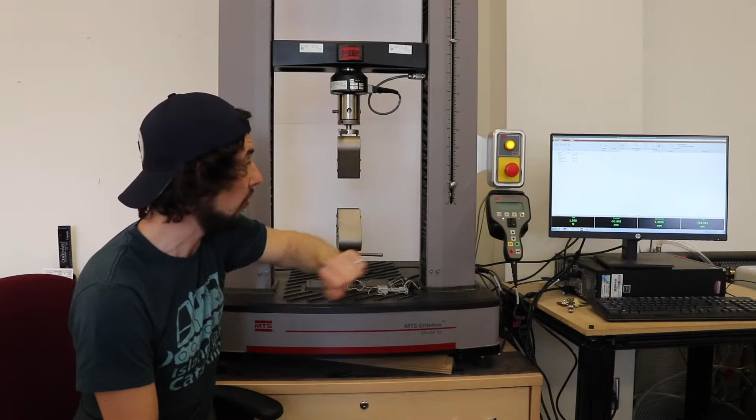So here's our materials testing system. It's an electromechanical system built by the MTS company. And it's got a couple of different grips. The lower grip here is fixed to the base of the instrument. The upper grip is attached to the crosshead, which moves up and down. And that's computer controlled over there with our PC.

And in between the upper grip and the crosshead in series is a load cell, and that's a force transducer. So that records the force that is being applied to a sample positioned in between the grips as the crosshead moves upwards for a tensile test or downwards for a compressive or bending test.

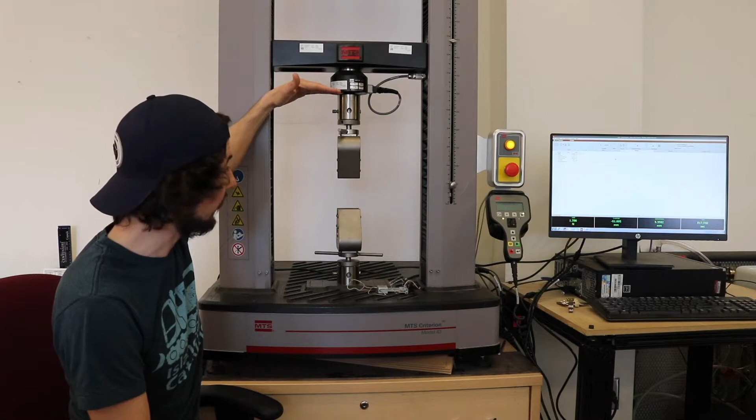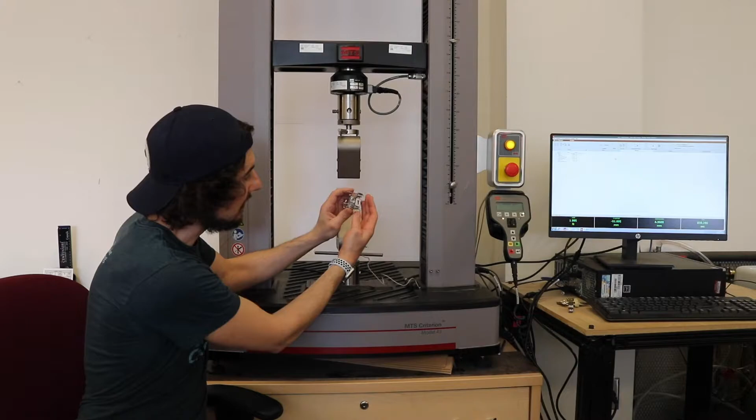Now, for elongation of the sample, which we'd need to calculate stress and strain and produce a stress-strain curve, what's used is this little device called an extensometer. So it's a really sensitive device, and what it does is it has two knife edges right on the ends there that get physically attached to the sample that's being tested using these little spring clips. So these little spring clips just go around your sample and secure the knife edges onto the sample.

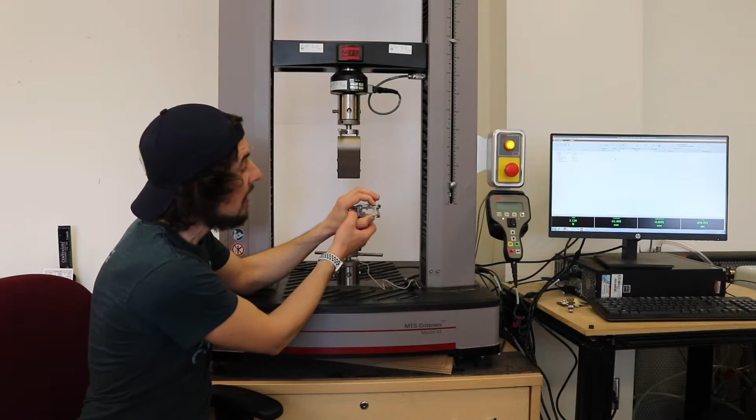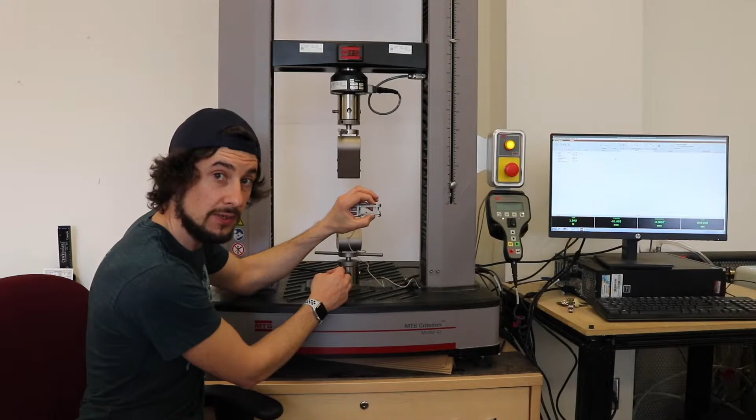And the extensometer starts on the sample with its arms closed at the start of the test. And there's a physical stop here on the extensometer so that you know when the extensometer is fully closed, the distance between these two knife edges is 25.00 millimeters. And as the sample elongates during the test, the arms of the extensometer separate, and that separation is recorded. And that separation is equal to the amount of elongation that the sample experienced between those two knife edges.

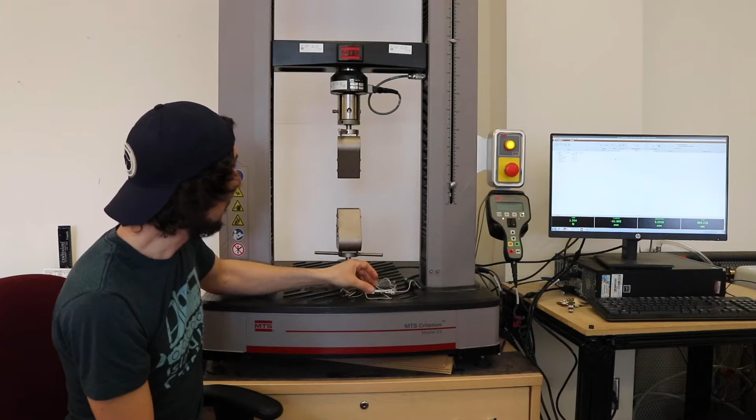During the test, the extension data from the extensometer and the force data from the load cell are transmitted and streamed to the computer where they're saved in a data file. So the data file that we're going to get out of each test has force data, elongation data, and we'll also record the time too. So there are all of those data columns that you're going to get in the test files for these different samples. So let's take a look at the different samples that we're going to test today.

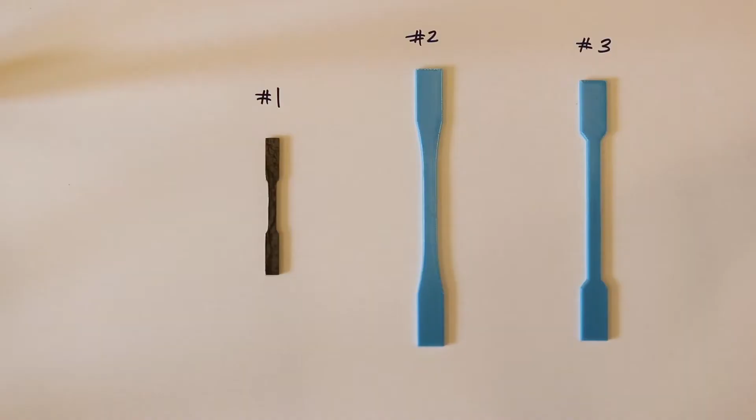Okay, so here are the three different test samples that we're going to test in today's lab. The first one's a sample of A1011 structural steel that's very similar in material properties to the A36 steel in your material property tables. And the second two samples are both made out of PLA plastic that's being printed with our Dremel 3D printers here in the lab.

Now, the shape of these tensile samples is described as a dog bone shape, and the reason for that is that the wider portions at the top and the bottom are where the samples are gripped for mechanical testing. And the compression force that's caused by the grips tightening against them induces some additional stresses that you don't want to have compounded into the results of the tensile stresses that are being created during your test.

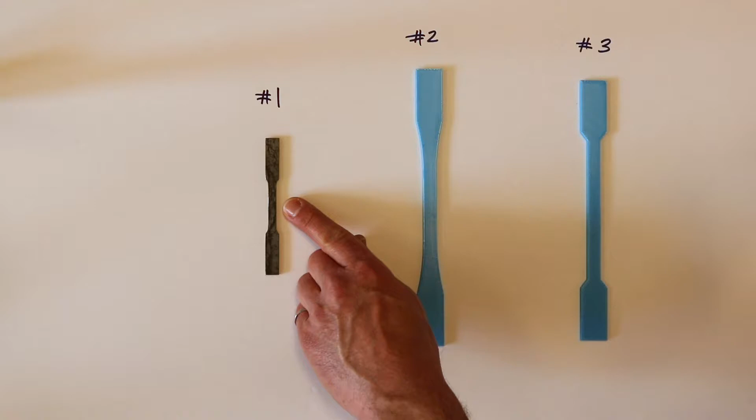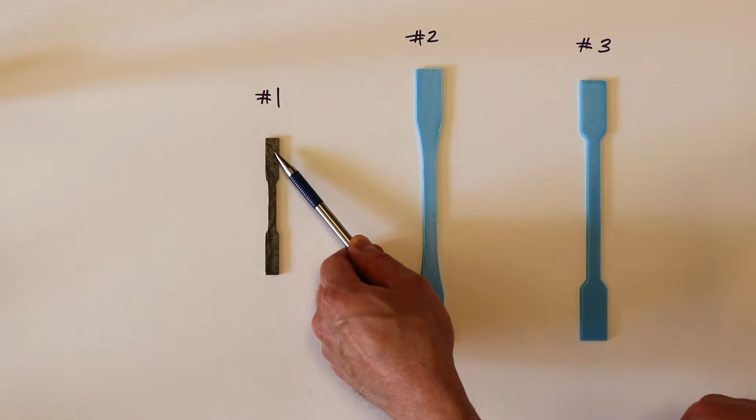So the actual area where the measurements are made for the stress that the sample is experiencing is throughout this center region that's called the gauge region of the sample. And this central region is far enough removed from the spot where the sample is going to be gripped and compressed that our lines of internal force transmission throughout this central region are all going to be nice and parallel to one another and aligned longitudinally with the sample's axis.

So in order to calculate stress from the force that's being applied to the samples, we need to know what the width of each sample is, so the measurement across here, and also what the thickness of each sample is, and that gives you the cross-sectional area of the gauge region. So what I'm going to do is I'm just going to use my calipers to measure what the width and thickness of each one of these three samples is, and then I'll write them down here at the bottom.

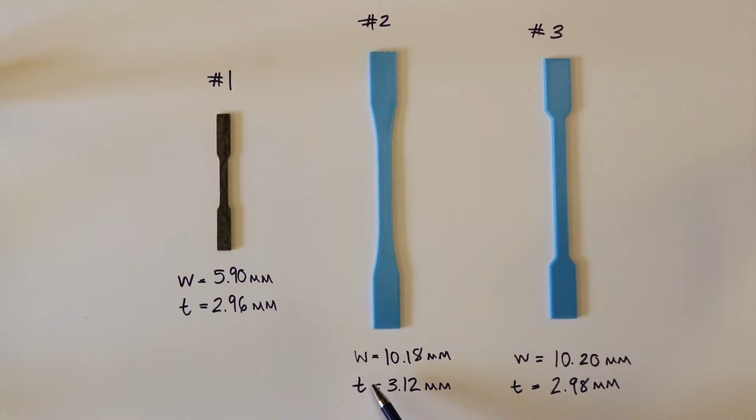Okay, so I've made the measurements of the width and thickness of each of our three samples, and you can see them written down there. So for the structural steel, width 5.90 millimeters, thickness 2.96 millimeters. For the first PLA sample, second sample out of the three, we have a width 10.18 millimeters and a thickness 3.12 millimeters. And then for our third sample, also PLA, we have a width of 10.20 millimeters and a thickness of 2.98 millimeters.

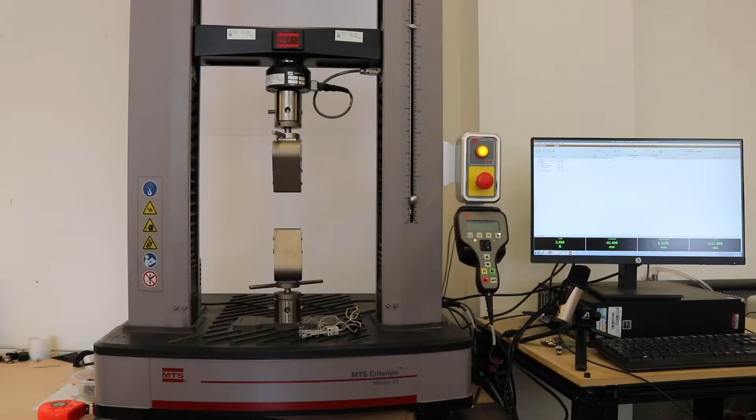So I'll get the first sample now. So we're going to do the structural steel first. So I'll mount that in the material testing system, and then we can start our test. Okay, so I've got our first sample here, the structural steel, and what I'm going to do now is mount this in the material testing system.

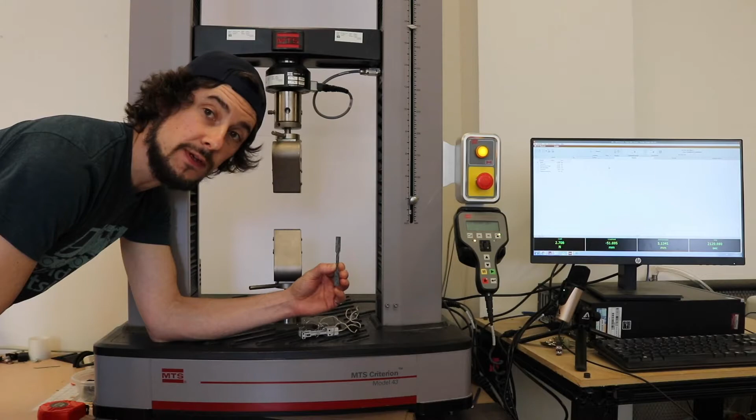So the first thing I'm going to do is mount it in the bottom fixed grip here, and I'm just making sure that it's positioned in the center and getting it set so it's vertically straight. Okay, and then I'm going to tighten this lower grip up and straighten it slightly. Perfect. Now I'm going to carefully put on the extensometer, and I'll give you a close-up of what this looks like after I get it on.

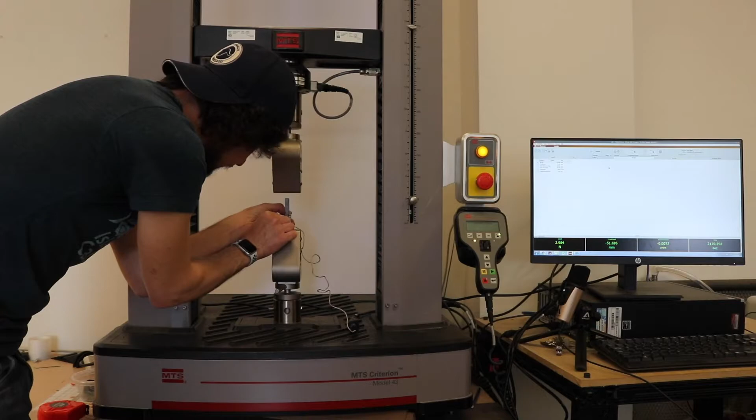But I'm squeezing together the arms just lightly to make sure they're fully closed. And there we go, the bottom knife edge is clipped on now, and the top knife edge is also clipped on. So the extensometer's attached now. Now the sample at this point is under zero load and it's zero elongation.

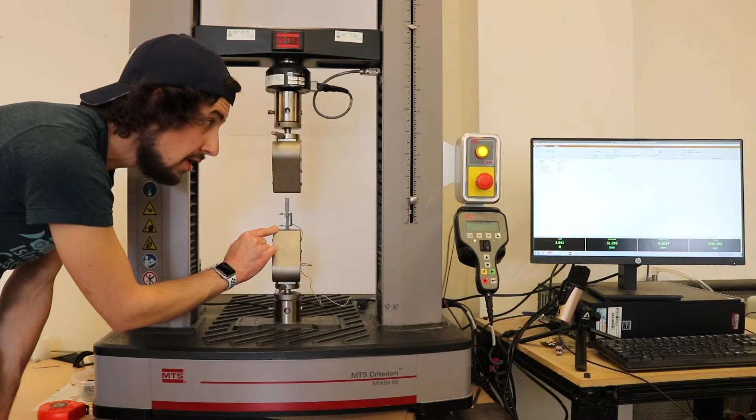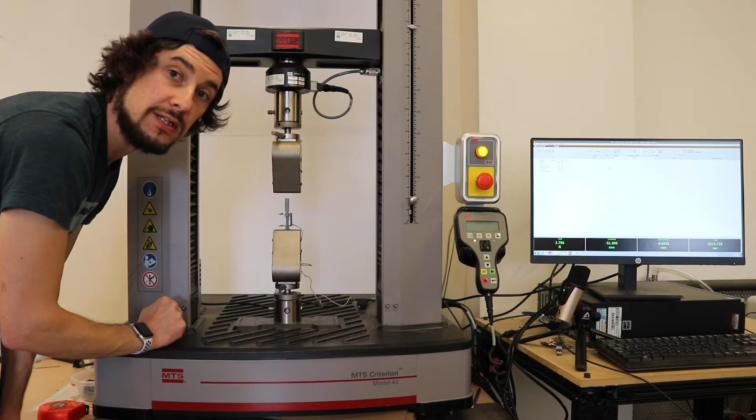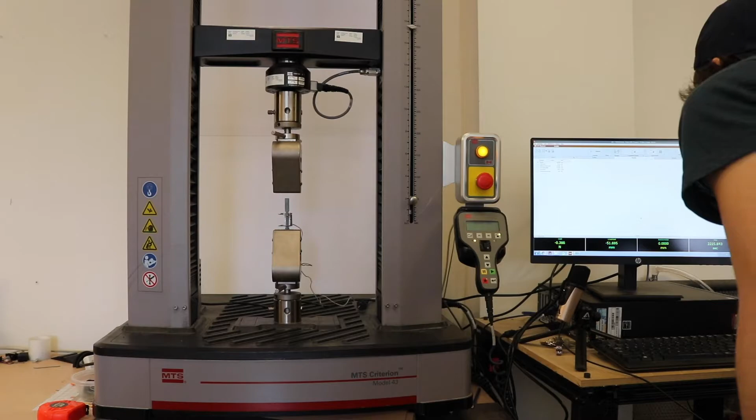So what I want to do is I want to go over to the computer terminal and just zero the force on the load cell and zero the displacement of the extensometer. So do that. So zero load and zero extension. Okay, so now we've got zero load, zero extension. Now I'm going to make sure that the top clamp is opened up, and I'm going to lower the crosshead down.

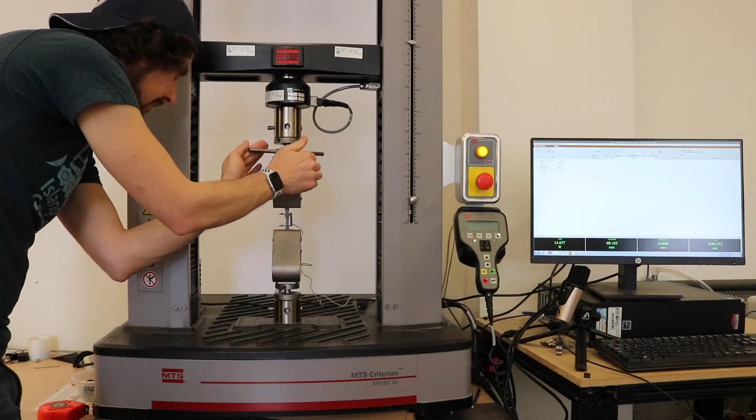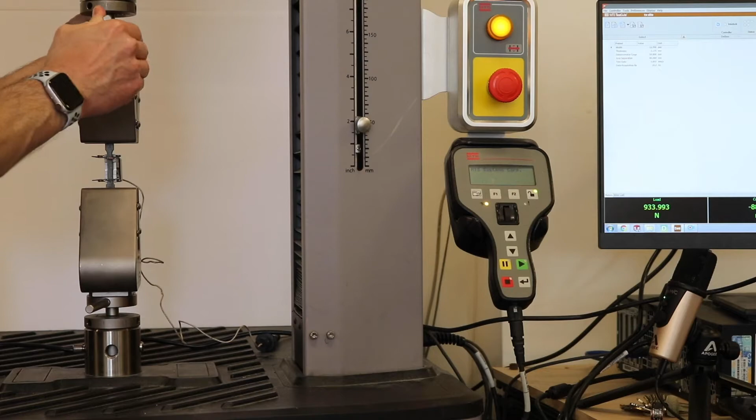Okay, there we go. And then I'm going to tighten the top grip up. There we go. Okay, you may be able to see over here now that when I tighten that clamp up, there's a significant load that's being applied, right? So here I've loosened the clamp again. Now I'm going to tighten the clamp up, and there we go.

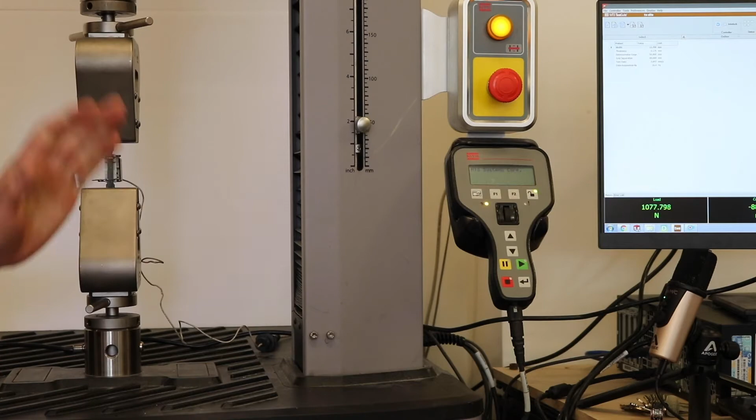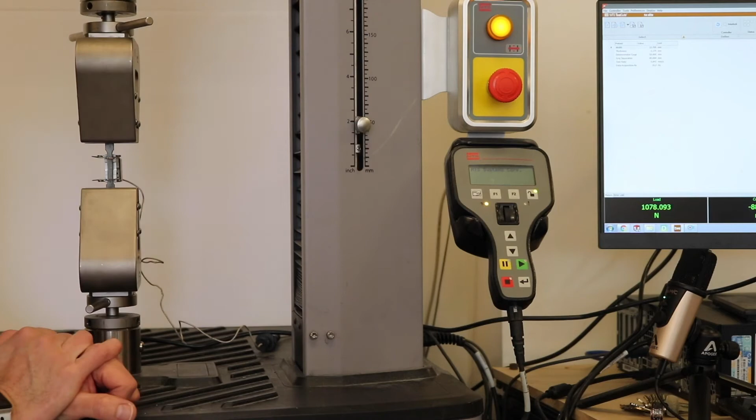So just by clamping it, we've extended the sample up slightly because of the way these grips are designed, but that's okay because that load now that we've induced by tightening up the clamps is captured as our starting load, and the extension that's being recorded is captured as our starting extension as well.

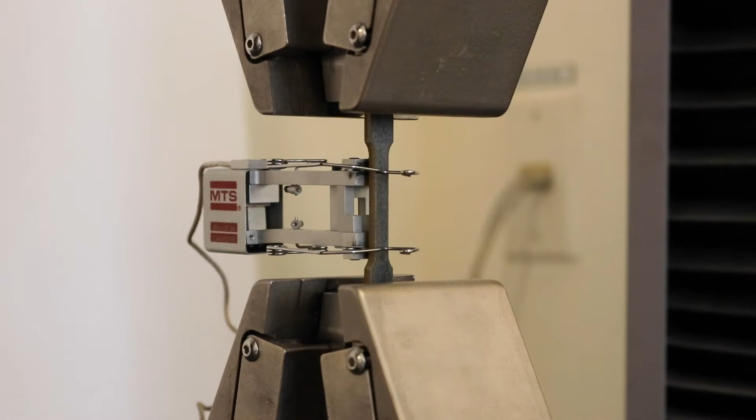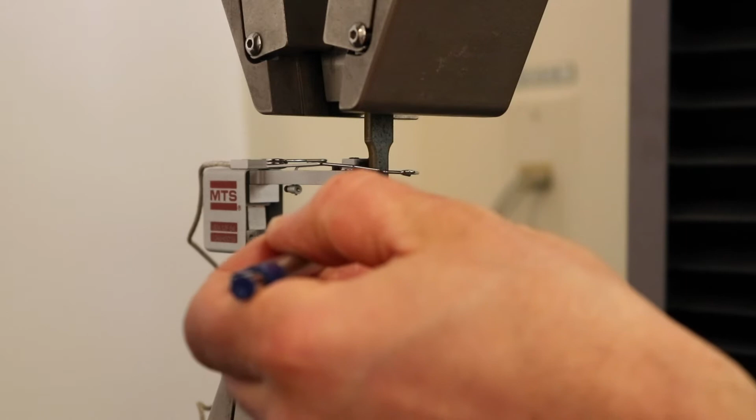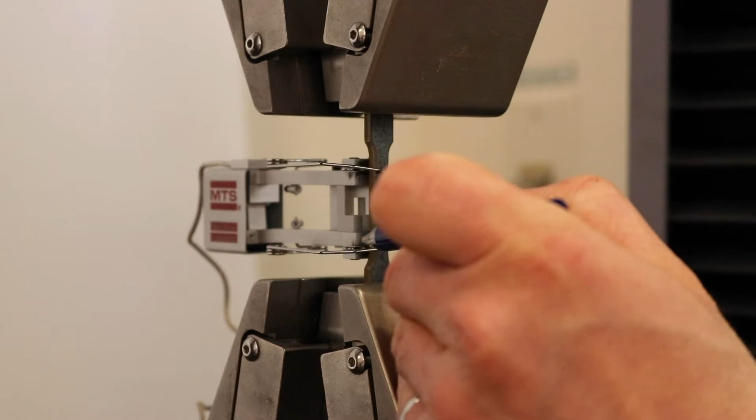So here's a close-up look at what that extensometer looks like attached to our sample. So you can see the clips that are holding it in place, and the knife edges on the back here that clip to the sample. So as these arms of the extensometer separate, it'll record the extension between these two knife edges that are initially separated by a distance of 25.00 millimeters.

Okay, so we're all set up here now. We've got our sample fixed in place and we're ready to begin this test. So I'll hit the play button and the crosshead will start moving up here on the system and we'll get a live graph that develops of force that's being applied to the sample versus elongation of those extensometer arms, or separation of the extensometer arms, which is elongation of the sample between the arms.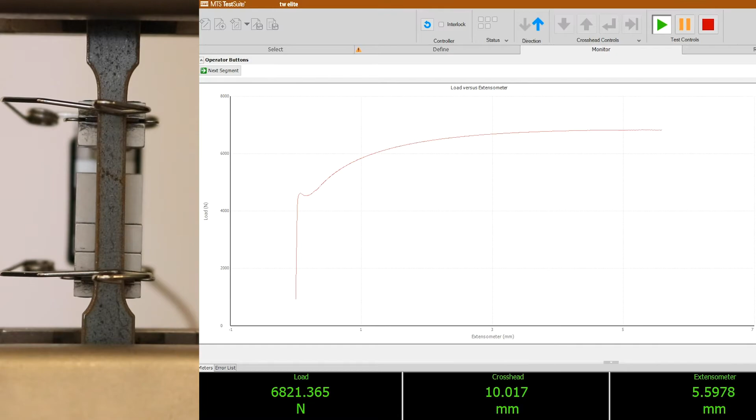Okay, so you can see that the slope is becoming increasingly flat, so we're approaching the ultimate strength of the sample here. And as soon as the curve begins to decrease in force, you should see a point of focal deformation in the sample develop. And that's the necking region within the sample where all the extension is going to be concentrated. And the development of that coincides with the beginning of the necking region of the stress-strain curve.

So let's look for where that necking region is that develops. Okay, it should be visible here soon. And you can start to see a focal decrease in width occurring right about there. That's where all of the elongation in the sample is now being concentrated.

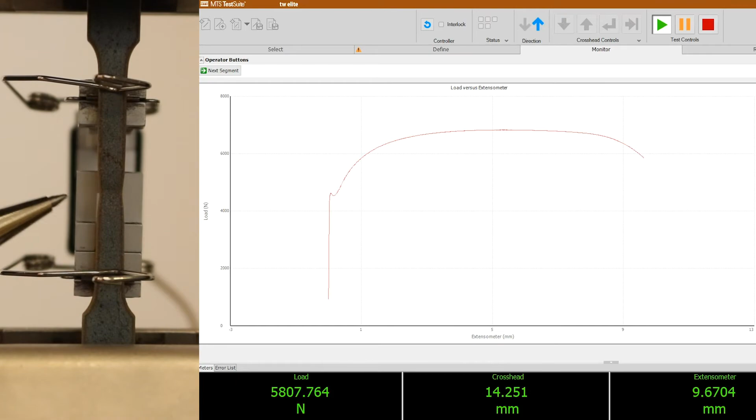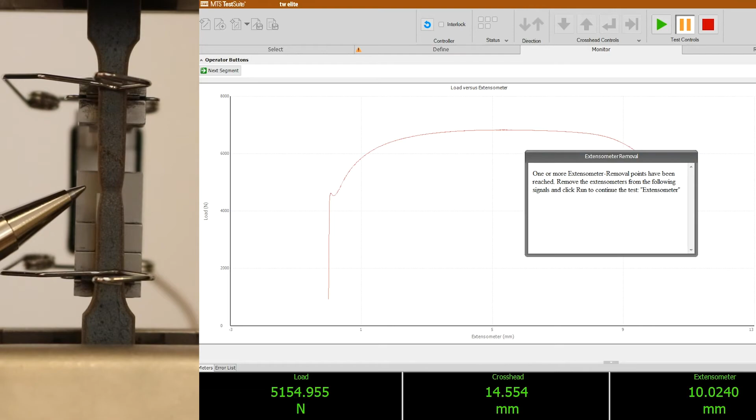So overall, on our force deformation curve, the force is going down, but the actual material within this region is becoming stronger, even though the sample is able to withstand less and less force. And you'd see that if you were to plot a true stress-strain curve, which would require measuring the cross-sectional area at this location continuously throughout the test.

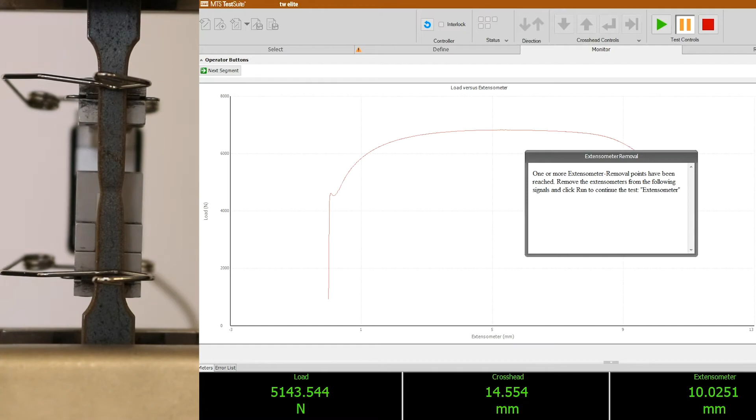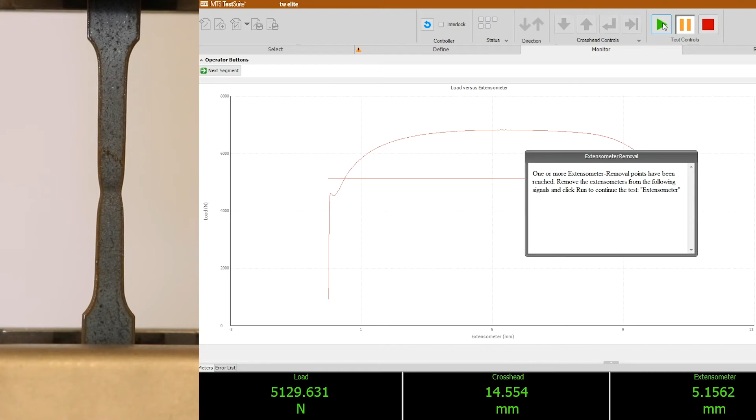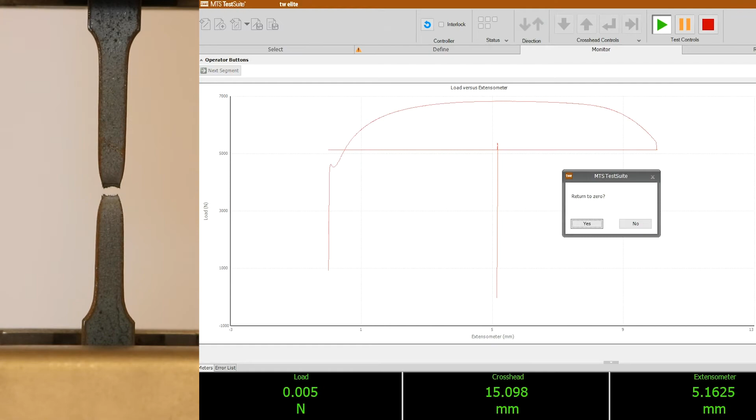Okay, the test is paused here, and that's because the extensometer has a maximum deflection of 10 millimeters. So I'm going to remove the extensometer here. Okay, there we go. And now we'll start the test running again and let the sample fracture. So you won't see any displacement anymore on our curve. So there we go. So the sample's broken now. So that finishes up the test of the steel sample. So I'll save that data and then I'll get the first PLA sample mounted up and we'll do that test.

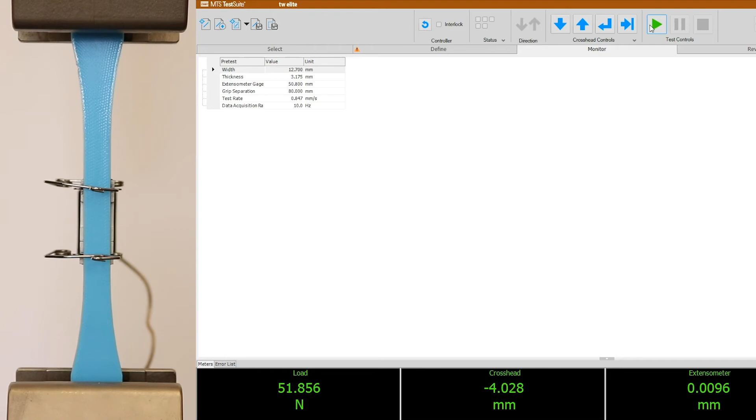Okay, so we've got our first PLA sample all set up here, ready to go. So we'll start the crosshead moving and see what the force elongation curve looks like for this sample as it develops. So here we go, starting the test. All right, so nice linear response there between load and elongation. So the material really does behave like a spring in this region, F equals kx, or if you normalize those values to the dimensions of the sample, stress and strain, or stress equals modulus times strain.

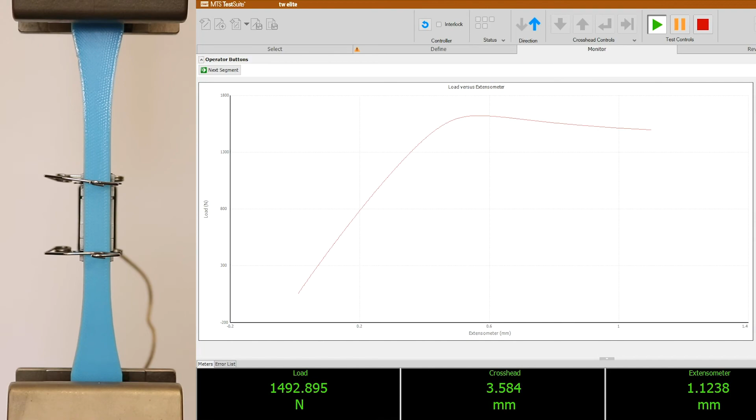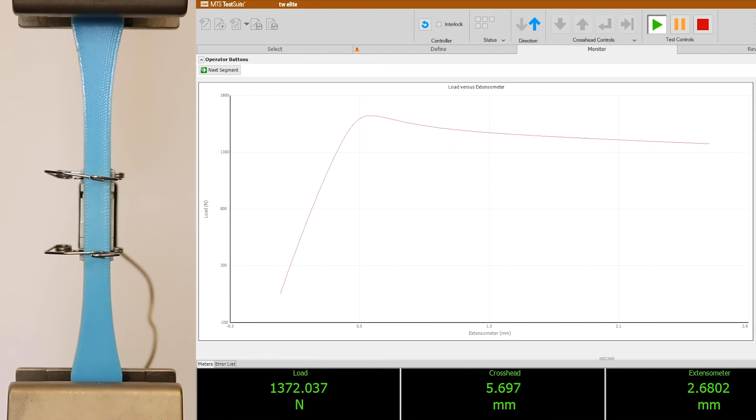Now the curve is becoming a little bit non-linear. And decreasing in force carrying capacity now, and we should be seeing fracture sometime soon. Okay, so good fracture near the center of the sample there is what we'd sort of expect.

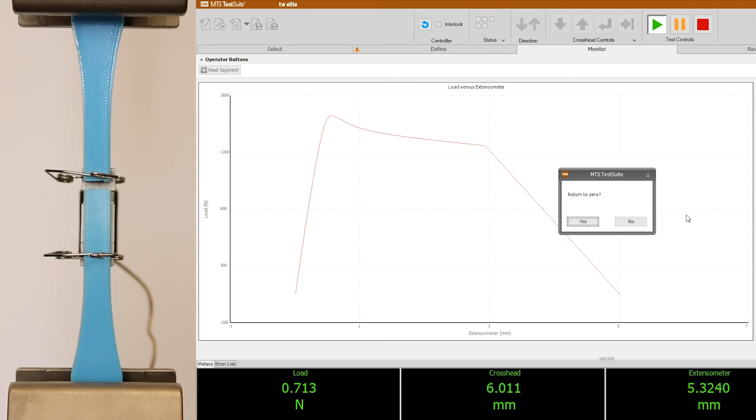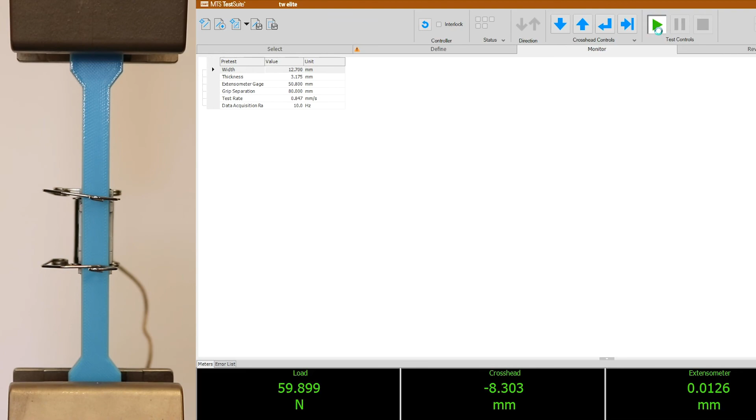Okay, so now we're ready to test our third and final sample, our second PLA sample. So let's start the crosshead going, and we'll again see how the force elongation curve develops for this sample. Okay, nice linear response between applied force and elongation there. Up at a little over a kilonewton of applied force.

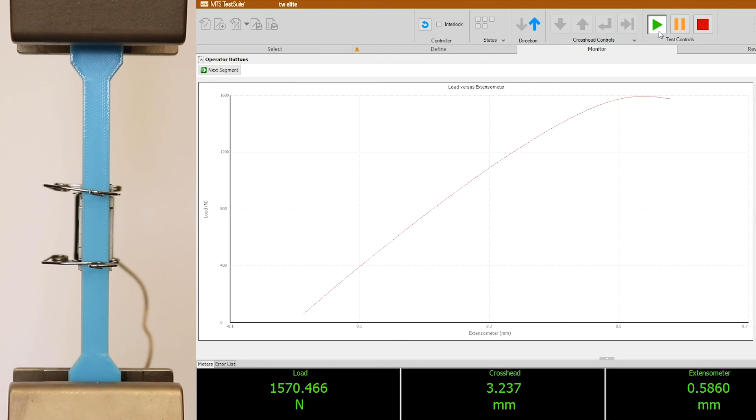And the curve is decreasing in slope. Okay, and fracture. So we'll stop that test there and save the data.